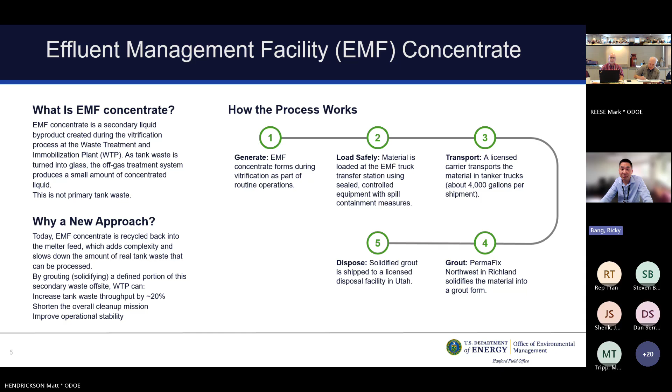On the next slide, when we can ship our EMF concentrate, I don't have exact numbers for this, but what it would look like is there would really only be a few trucks going to Permafix Northwest. We can do about 10,000 gallons at a time, so that may be 3 trucks if you do that math. And by the time we get through sampling characterization, you're really looking at maybe 3 trucks every other month that this would add to the highway system.

So, and again, the other part is we are limited to just 87,000 gallons a year. We've discussed up to 400,000 gallons with Ecology to help us with that double shell tank space challenge, but we're not successful with that initially. Any changes to the 87,000 gallon volume would require a permit modification.

Could we ask what form the grouted waste is? Is it in granules, as blocks? Could you describe the physical form of the grouted waste?

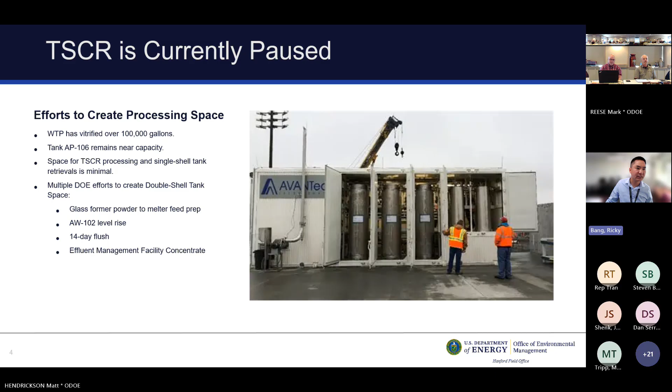And I'll get back to this dual path approach. So I've talked about how we've presented a dual path approach with glass and grout for what we're treating in our 200 East area, adding an alternative pathway, which is grout, to our glass pathway. It provides the operational flexibility for us to keep treatment operations going at that 100,000 gallons a month and 30,000 curies a month. It allows us to keep retrievals operating and pulling tank waste out of our single shell tanks and into our double shell tanks.

And I know Oregon has asked about transportation through their state. I will say we've heard and understand those comments we've received, but I also hope you've seen what we're doing with EMF bottoms and concentrate to alleviate some of those concerns. We do consider those comments as we make our decisions for things like EMF bottoms and grouting in Washington before shipping.

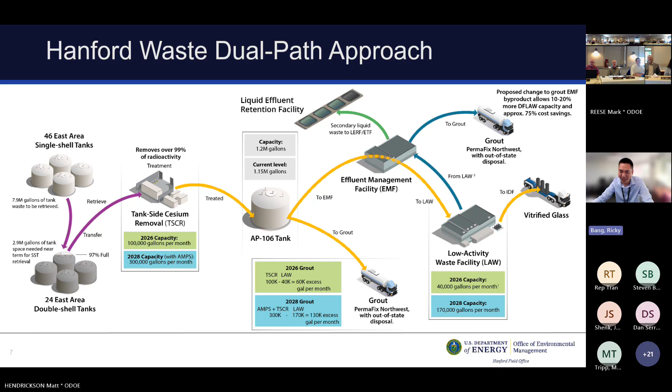Oh, good questions. So the 242 evaporator will do its next operational campaign July 6th, right after the 4th of July holiday. It should do one campaign this year, but here's the issue we run into with the evaporator. It did well over 1 million gallons last year of space that it created, but it's concentrated the waste in AP farm to the point where we can't concentrate it anymore. When you evaporate water from salt water, you get very salty water, and we just can't evaporate any more out of it. So once we finish this campaign in July, I think that's the only one we could do this year, because we can't evaporate more water from the tank waste. We have to have an outlet from AP tank farm.

To transition to your second question on WTP melters: 2 melters exist in the WTP low activity waste facility. We currently can operate 1 melter for a few days at a time. We're doing better each week — we just had our best run in May, getting to 30,000 gallons. We are seeing more melter leakage than expected, and also higher differential pressures across the system that we're still working through. So today, we don't think we can get to dual melter ops without substantial modification. As we continue to operate 1 melter, we expect to learn more, so we hope not to need a substantial modification, but that's currently where we are with dual melter ops. We're currently operating 1 melter at a time — we just finished up melter 2 and should restart melter 1 in about 2 weeks.

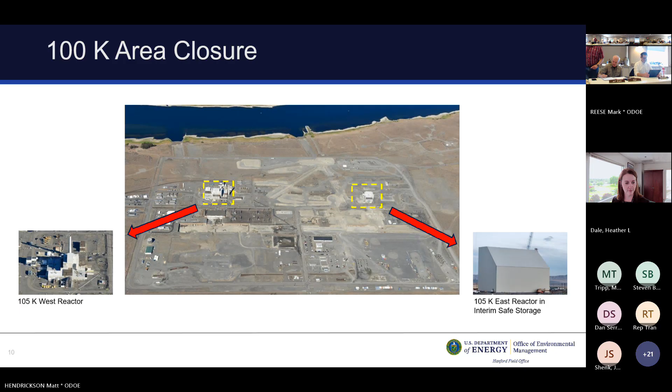I'll give an overview of our 100K project, the larger roadmap for completing K West reactor cleanup and preparing it for interim safe storage. This mission includes demolishing approximately 30 facilities and remediating about 50 waste sites. It's a sizable effort requiring synchronized environmental cleanup and structural removal.

Demolition of the K West Basin superstructure will continue through FY28, followed by removal of the surrounding reactor structures in FY29. After demolition and soil cleanup around the reactor, our crews will construct the protective enclosure, similar to what is currently on K East, and the reactor will be cocooned.

The path to interim safe storage, or cocooning, is a multi-year engineered progression. It's not just about tearing down buildings, but about removing the hazards, stabilizing the structures, and ensuring the environment remains protected throughout these activities.

The demolition activities, including our 116 K West stack work, are integral to our long-term plan, and each step moves us closer to getting this reactor into interim safe storage. For every year we can pull in this work, we save approximately 20 million in annual surveillance and maintenance costs. So getting this work progressing is a priority to the site.

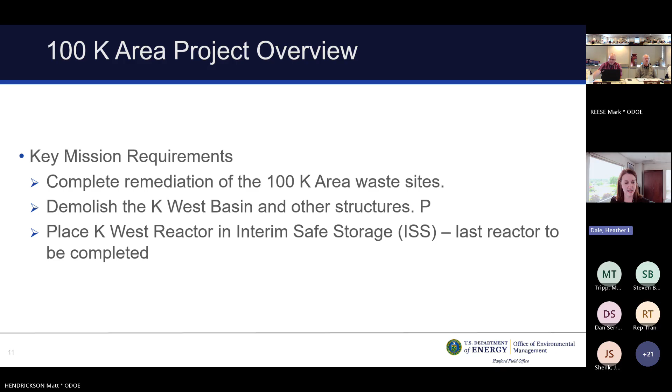This video shows the demolition of our 175-foot tall K West reactor stack, blowing over it.

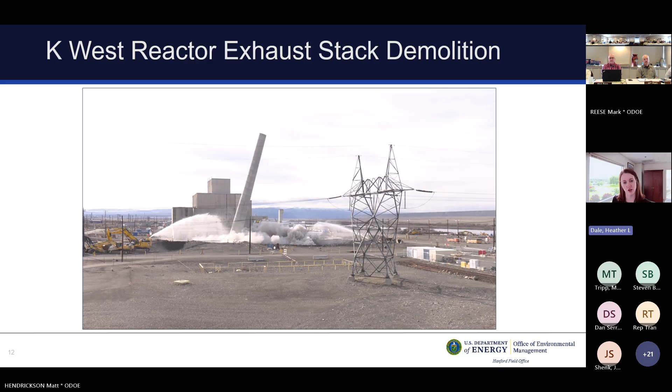The demolition used carefully engineered explosive plans executed by an integrated team to ensure the stack fell precisely within a controlled zone to minimize risk. Bringing down the stack marked a major milestone, clearing the way for subsequent debris size reduction, below-grade removal, and access for demolition of adjacent reactor support structures, which I'll talk about in the next slides.

This is a standard step to ensure safe and efficient removal of large demolition debris like the stack. It's important because reducing the size of the debris, turning a single large hazard into properly packaged waste, allows it to be disposed of and clears the work area so crews can remove equipment and begin the next phases of building demolition on the east side of the reactor.

Finishing the debris removal allows us to continue with east side demolition above grade and allowed below-grade work to progress. We're currently at approximately 85% complete with that.

Next slide. What you're seeing here is an operator working below grade to load the concrete debris from the stack area into the containers for shipment.

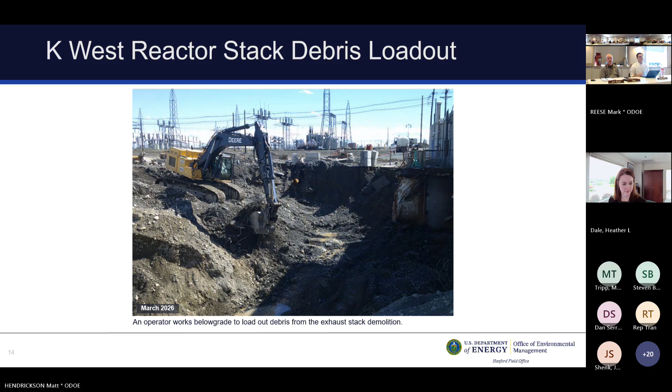Completing the last of the hazardous fluid removal eliminates a risk source that lets heavy demolition proceed without the chance of spills of these hazardous materials. Systematic hazard removal is how we protect our workers and the environment. It's also a required step before we can continue with our demolition activities.

After we removed the 2.5 million gallons of basin water and treated it at the Effluent Treatment Facility, or ETF, the basin was grouted. Workers started abating the remaining asbestos to prepare them for basin demolition.

This is important because abating asbestos near the reactor and ventilation system prevents dust and fiber release during adjacent demolition activities, which includes work associated with the former exhaust system, and it keeps the demolition zone compliant and safe.

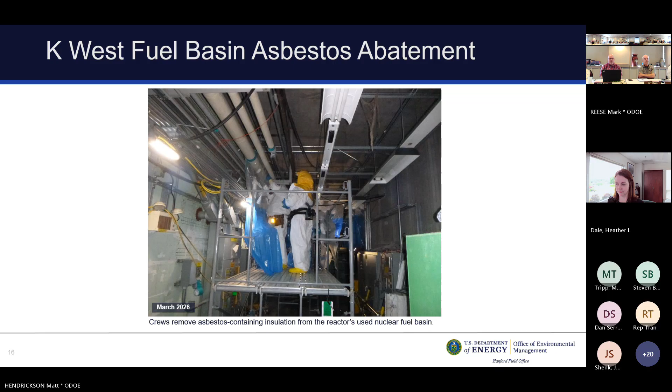The crews are removing buried rooms and infrastructure such as offices and control spaces that sat near the exhaust system routes. This makes sure that the old buildings and subsurface voids don't remain as potential pathways or obstacles.

Clearing the below grade structures around the stack tie-ins confirms the exhaust system is fully removed and the site is prepared for long-term stabilization, which is what we're currently working toward.

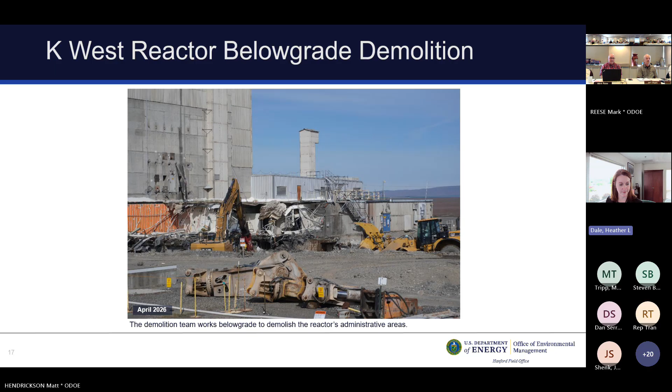Targeted removal of the control room and administrative structures, as I've talked about, on the east side of the reactor, coordinated with continuous dust control, are used to protect our workers and the environment during heavy mechanical demolitions, such as what's going on in the 100K area.

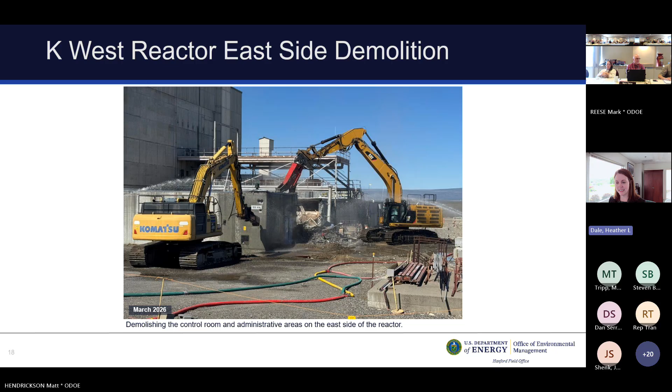Taking down the control room area eliminates structures tied to the former reactor operations, and it clears the area around the old exhaust system, confirming that stack demolition can be closed out with clean boundaries.

The rod room is where the control rods were handled. The control rods were used to help control the nuclear reaction, and they're actually close to the reactor core.

Entering the rod room and performing air gapping of the fuel rod tubes allows us to continue progress in the west side with the rod rack room above grade.

This is important again because we want to remove the ventilation support spaces. We want to verify the air gaps and ensure there's no residual airflow or contamination pathways associated with the former exhaust system, so that we can fully retire the stack's function on the site.

Together, these steps complete the 116 K West stack demolition, and they move our K West area towards interim safe storage and shrink the legacy footprint near the river, demonstrating the careful safety-first approach that is expected of us.

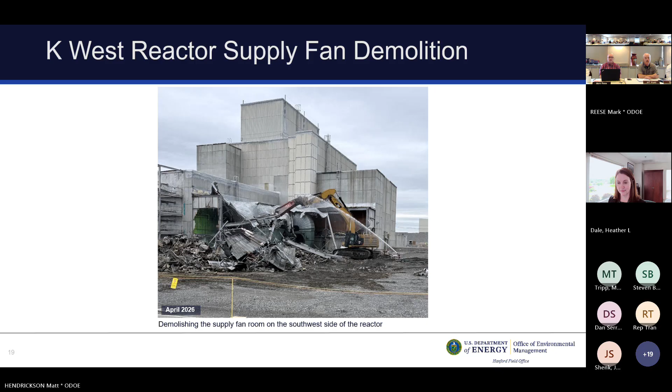And with that, I will take your questions.

Thank you, Heather. A couple quick ones. Just for the folks on the board here, all of the waste that's being generated from the demolition is landfilled on site, correct? Yes. And people that lived in the neighborhood or downwind might wonder what came out of that stack when it was in operation.

What came out of it when it was in operation? Yes, I will have to check on that for you.

Okay, and then finally, where is the sludge from K West now? Yes.

The T plant. The sludge from T plant, is that what I heard? The K West sludge, where is it now and how is it being stored? I will have to check on that as well.

Okay, any other questions? I don't want to give you a wrong answer. I could tell you, this is Ray Geimer, because that was my project when it was going on. So it's stored in the T plant, in the cells in T plant. There's 22, if I remember correctly, of these fairly large, heavily shielded storage containers that the sludge is stored in, and it's kept underwater in those containers, and a couple times a year they go in and check to make sure the water level still has the sludge material covered.

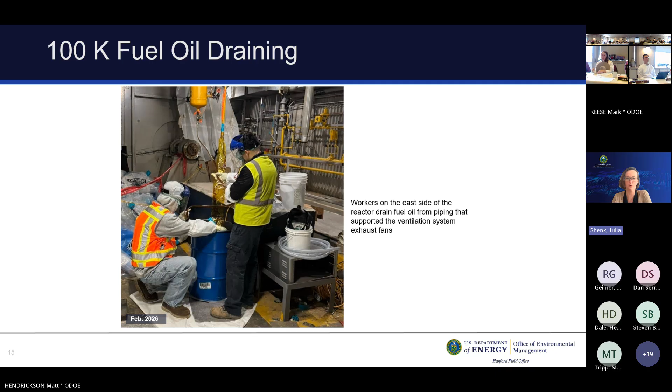Yes, I am. I think you have my slides, but I'll go ahead and get started. I know we're a little behind, so I'll try to get things moving. My name is Julia Shenk. I'm the director of the Office of Packaging and Transportation, which is in EM headquarters. We're based out of Germantown, Maryland, and Washington, D.C. We're within EM's Office of Waste and Materials Management. I really appreciate the invitation to speak today and the interest in our headquarters programs. So changing gears a little bit, I'm going to talk at a high level about some of the programs and tools that we manage out of headquarters that are available to assist our sites in accomplishing their mission. Ricky hit on a couple really good examples of how some of those things work, so I'll try to make that link as we go along.

Okay, so this is our mission. Don't need to spend a lot of time on this. Again, we're a headquarters organization, my office, so we're not on the ground doing the work. That's taking place across the country at our sites like Hanford. So we provide a suite of programs and tools - oversight, assistance, policy, software, packaging solutions - that our sites can access to help them get their work done. Our mission is a little bit unique because we are an EM headquarters office, but our programs and policies are available to all of DOE. That means Office of Science, Office of Nuclear Energy, some NNSA activities. So all that to say that we are trying to maintain consistency across all of the programs in the way that we do packaging and transportation. Next slide, please.

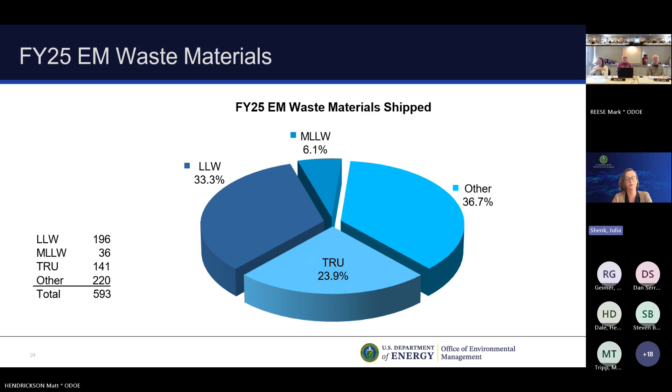Next slide, please. So this is EM waste specifically. You can see in the chart, which probably is not a big surprise, the majority of EM's recent waste shipments are spread across low-level waste, mixed low-level waste, and transuranic waste. The other category could include other RCRA waste that's non-rad, used fuel, other special materials. Next slide, please.

So there's a lot of information here. I'll try to cover it quickly. So we're moving 5,000 shipments a year. What are we, DOE, doing to ensure that these shipments are moving safely and in compliance with regulatory requirements? And how do these programs and tools help enable the mission at Hanford and DOE sites around the country?

So the first one I'll highlight here, and get into a little more detail later on - under compliance, we have our motor carrier evaluation program. At any given time, we have about 30 carriers that we specially evaluate and approve to transport radioactive and hazardous materials for the department. So as a baseline, if we're putting something in the public domain, offsite, on the roads, we're complying with Department of Transportation. Everything here is DOE specific - programs and tools that provide additional safety, security, communications measures that are specific to DOE shipments. So one of those is our carrier evaluation program. Ricky mentioned in one of his slides, the contract with Hittman in conjunction with the work being done at Perma-Fix. Hittman is one of our approved carriers. I'll talk about that a little bit later.

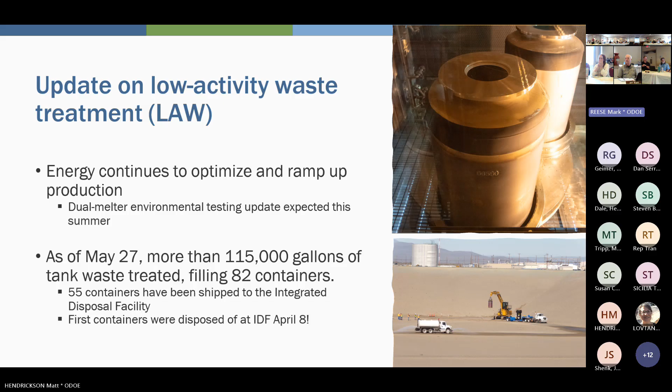So we have been working with Department of Energy over the last six months or so on a permit modification to further expand the efficiencies that Department of Energy is trying to achieve, having to do with the mixed waste byproduct routing from the effluent management facility. That modification went through a public comment period, a public meeting, and had recently been issued by Department of Ecology via letter. There is a 30-day grace period associated with that.

As long as Department of Energy has all its other requirements in line with other agencies such as Department of Health, they should be able to move forward with their project to route some of the bottoms from the effluent management facility itself.

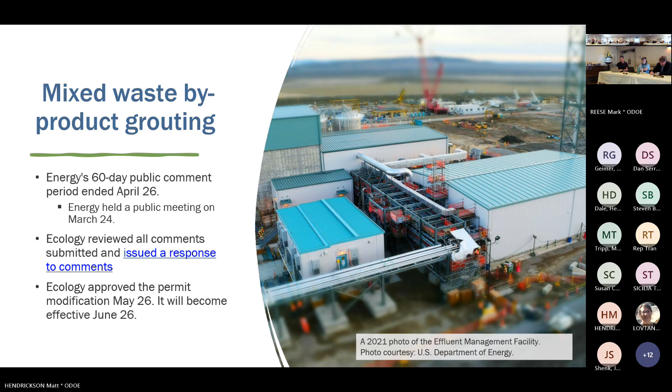All right, so we'll talk about some other obligations Department of Energy has on the books. We're going over to 200 West tank farms. We spent a lot of time in 200 East talking about DFLAW and the activities happening there. We're now switching gears and focusing our energy on 200 West.

We had talked about this, and I think Max had mentioned it. On July 1st, Department of Energy has to make a decision on where they're going to use their alternative treatment for the tank waste in 200 West, the grouting of that tank waste. Ecology awaits that decision because that will help us decide what we need to do to get the permitting done so they can start their activities in 200 West.

Right now, we're going through some permitting planning with Department of Energy on the pre-treatment system they're going to set up over there. Much like they have TSCR on the east side, they're going to have a similar pre-treatment system on the west side. We're going through our permitting planning to get that ready, go through the public comment period associated with it, and allow Energy to get to the place where they can start construction of the facility. All this stems from the holistic agreement, which was signed back in January of 2025.

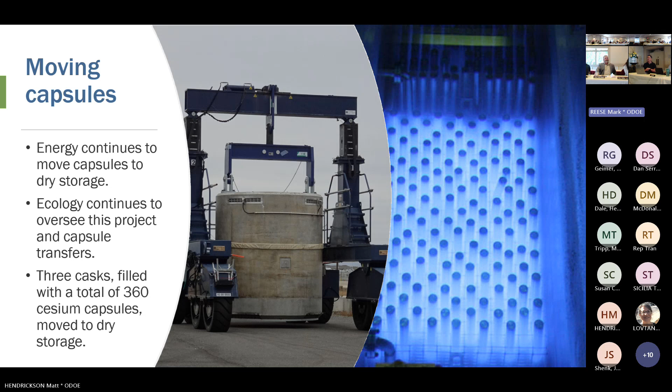So a little bit about public involvement that's coming up here. I believe Ricky had mentioned this. On June 17th of this year, they're going to have the notice of intent public meeting in Richland. It will be a hybrid meeting. Ecology will be there as well to support in some capacity.

This is related to the work that's going to go on in 200 West. Right now, we don't have the ability to treat in 200 West because the double shell tanks over there are full. We don't have the ability to treat any of that waste because the transfer lines that go from 200 West to 200 East are not operational at this point. So based off of the holistic agreement, we're moving forward with the notice of intent and the permitting associated with this here in the near future over the next couple of years.

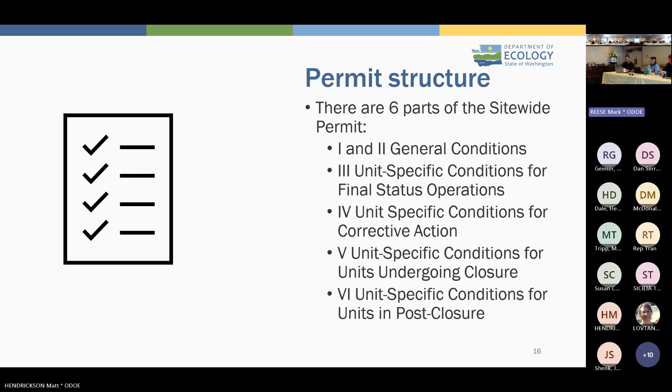All right, so I alluded to this a little bit earlier. We currently do have a publication out there—there's a link in here to it—the Rev 9A baseball cards. Those are out there right now for folks to look at. As we get closer to the public comment period, I really do encourage folks to go look at those baseball cards, look at each one of the facilities on the Hanford site, and get a little bit familiar with each one of those facilities.

We also have the website that's live right now, which has updates about the public meetings that are going to be happening, the lunch and learns that we're intending to host every Wednesday for, I believe, 10 weeks, starting July 22nd. The website's out there, the public hearings that we're going to have, and an opportunity to ask any questions ahead of time about any of the information we have on the website right now, also leading up to the public comment period.

So really encourage folks to go take a look at that as we approach the renewal and work towards a final status permit for the entire Hanford site. That's all I got. Okay, thank you, Eddie.

You anticipate this entire permit to be somewhere in the neighborhood of 20,000 pages? Is that what I understand?

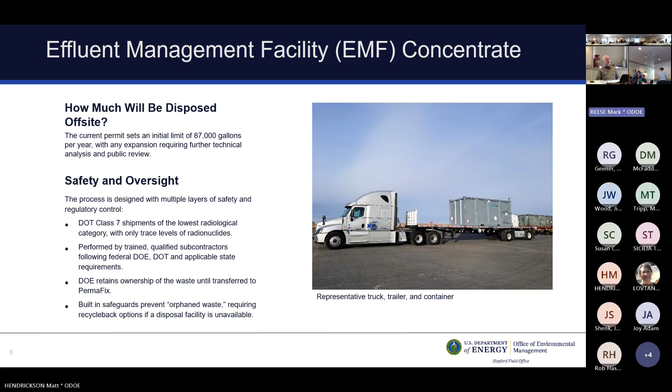Let's reconvene. Matt, are we ready to go on the slide deck? We're working on it. For some reason, the slide deck likes to reset to the first slide every time. I can start there, anyway.